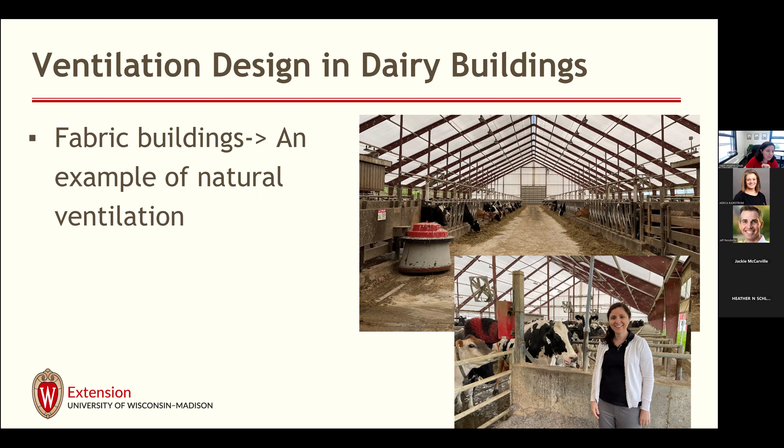This is a very good example of natural ventilation. This is one of the newer buildings, so it is actually state of the art. It's maybe a little difficult to see, but you can see the ventilation fans at the very end. We have the circulation fans, and we also have the exhaust fans that are placed on the roof.

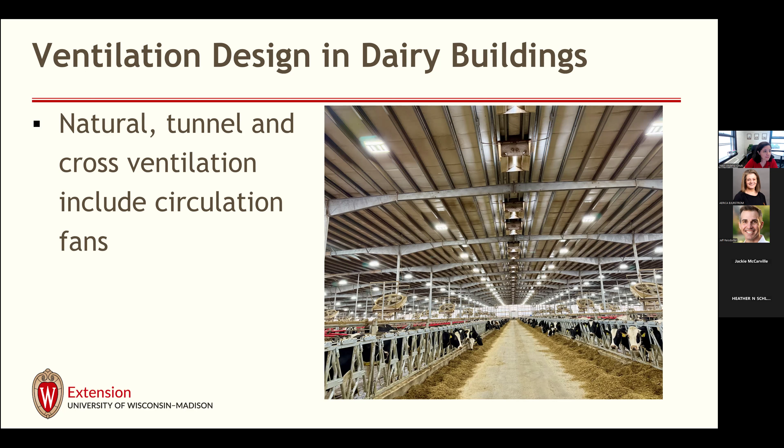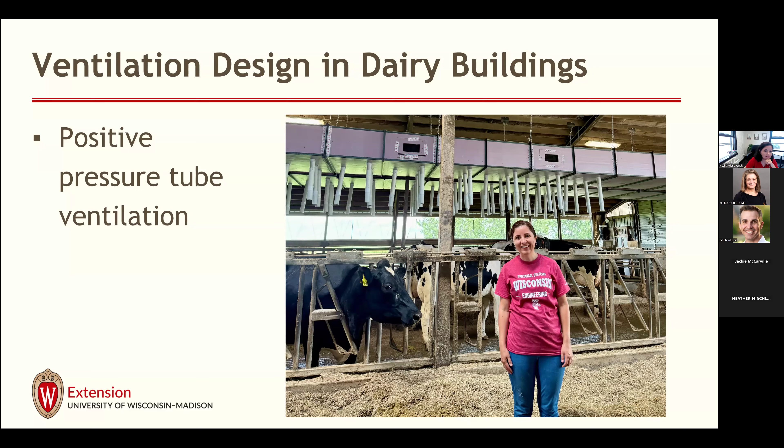So, what motivated us? Why did we develop this online tool? I wanted to talk about this a little bit before we dive into the calculator.

So we looked at the weather data in Wisconsin. There are different regions. According to one source, there are 9 different climate regions in Wisconsin. But when we look at the big picture, we can separate it into 2 regions: northern or central Wisconsin, which has a little bit cooler summers, and the southern part of Wisconsin, where we are located in the Madison area, which has a little bit warmer or more humid summers.

Then we looked at the weather data over the last 20 years. We checked the weather data on average from 2000 to 2004 and compared it to 2020 to 2024, so the last 5 years versus 20 years before that.

Whenever the ambient temperature was over 20 degrees C, which corresponds to 68 degrees F, we called it a summer day. If it was between 4.4 and 20 degrees C, we called it a transition day, so a fall or spring day. And when the temperature dropped below 40 degrees F, 4.4 degrees C, we called it winter.

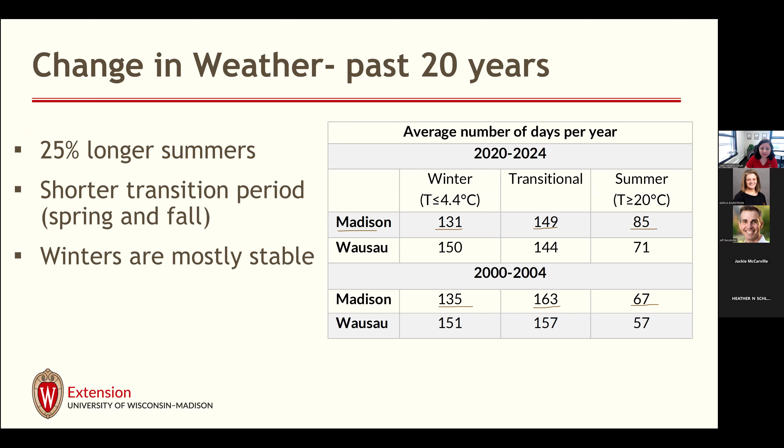So one, weather patterns are changing, right? There are seasonal changes. Two, we do have the wind shadow effect. For example, this is a farm that we are working with. They used to have maybe 1 or 2 buildings, but this farm is growing and they keep adding buildings. And in an ideal world, we add buildings parallel to each other.

But in reality, it's not possible. There are a lot of logistics. For example, if you have a building here and if wind is blowing from the southwest direction, this building here blocks the wind coming in and causes a wind shadow on the barn that I circled here. So one factor is the development of the farm, like having more buildings around, which doesn't let that wind reach our buildings sometimes.

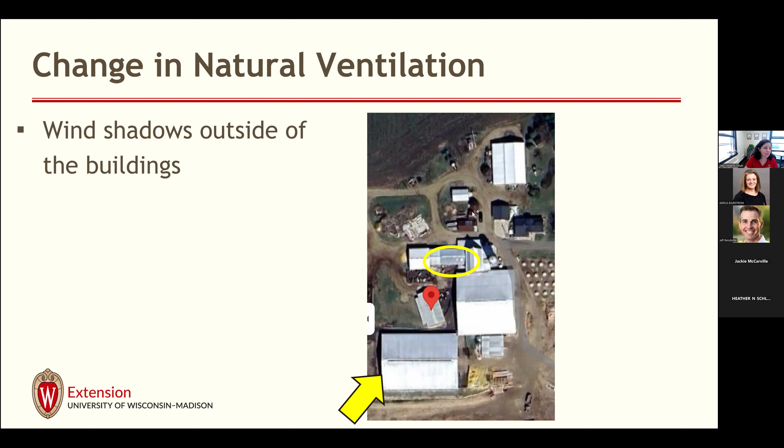And then another factor: wind shadow is not always outside of the building. Wind shadow is sometimes inside the building. For example, we have more robots inside the buildings. Right here we see the AMS units. So if they are put in front of an air inlet, they do block the air coming inside the building.

So here we see a simulation of the barn. Let me see if I can make this work one more time. Here we have the supply fans, which is our air inlet, and here we have our exhaust fans. Air moves in this direction. Here we have the AMS units, so I'll show them here.

Air moves, and then we have the circulation fans, we still have those big circulation fans. And then you can see this first row, which is usually the luckiest row since they are very close to the air inlet, there is a big wind shadow effect there. So we are looking at the velocity data here. These dark blue colors mean low air velocity. We want to see much more lighter blue or maybe greenish colors, especially at cow sitting height. But these AMS units are causing a kind of wind shadow inside the building, not just outside of it.

So, and then we see larger buildings, right? So maybe it used to be only 4 rows, maybe 6 rows. Now we see very, very large buildings.

So there are still places natural ventilation works. I am not saying we should all switch from natural ventilation to mechanical ventilation.

For example, this is the barn that we visited. This is the fabric barn. This is where it is located. So there are no wind shadows around, right? So it can capture all the natural wind that is coming in. And they have a very steep roof, so they have big wide opening side walls. So natural ventilation works for that farm, for that specific building.

But nowadays it doesn't work for all buildings anymore. Basically, due to changes in the seasons, since we have larger barns, and due to all the development, rural development, and having more and more buildings around, and wind shadow effects.

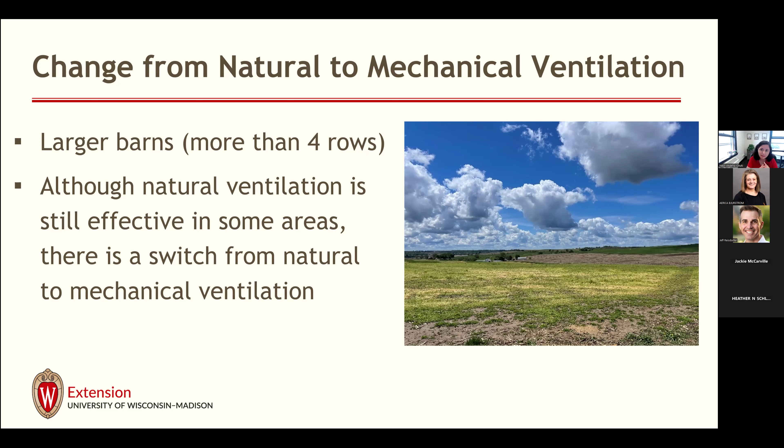So that was our motivation. So if we want to switch from natural ventilation to mechanical ventilation, here's an online tool that is available. And here we see the two links, and I will explain the difference between them.

So our link is go.wisc.edu/coolcows or go.wisc.edu/coolcows2.

And this is how it works. So step number one, we need to choose a location. Once we choose the location, there is a map on the calculator and it highlights that region. I will show you the calculator in a minute.

It is ready on my other screen. So either we are going to say we are in the southern part, or we are in the central part, or the northern part. So two climate regions.

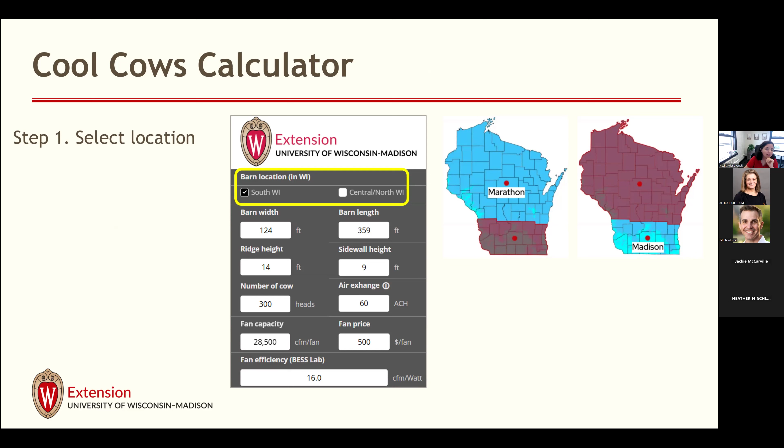Then we need to enter barn dimensions. So some numbers are entered in the calculator. These are just examples, kind of a space saver for you.

Number of cows. So one important part of this calculator is it assumes that there is no overstocking. The reason we are asking is so that this specific barn volume is able to accommodate this many heads. So we have this many stalls and this many cows, and there is no overstocking.

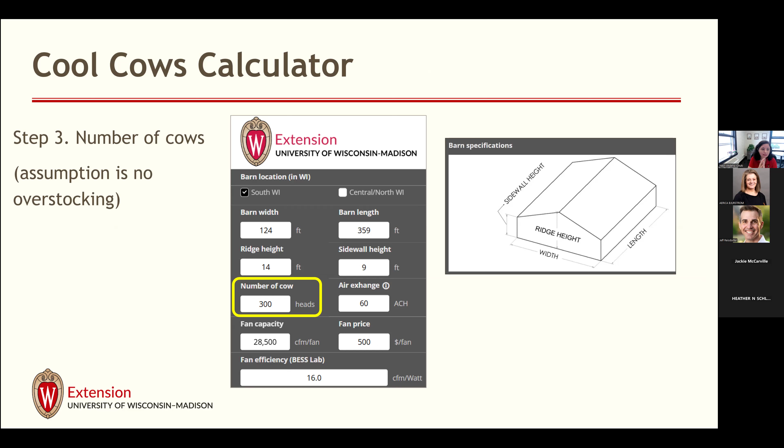So the reason we are asking number of cows is so that we can estimate energy consumption per head, to be able to make some comparisons. That's the main reason we are asking number of cows.

Air exchange rate. The recommended air exchange rate in summer for lactating cows is 60 air exchanges per hour. If you have a different number in mind, 60 has already been entered in the system.

But if you have a different number in mind, for example, if you're not talking about lactating cows, if you're talking about dry cows, if you want to enter a number like 50 air exchanges per hour, you're able to do that. You can just change that number.

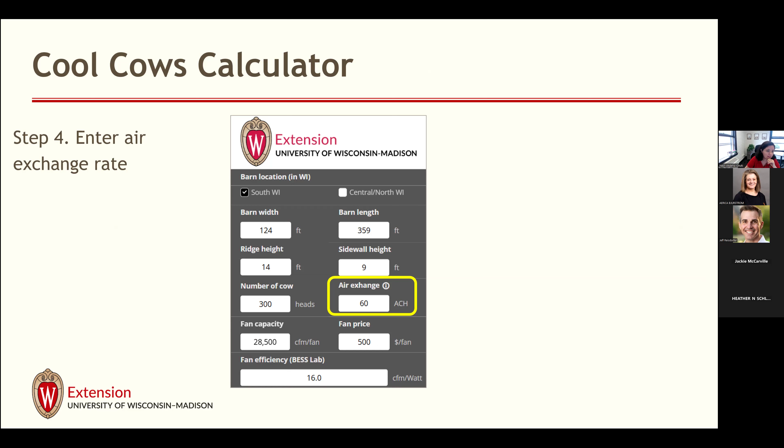And then fan capacity and fan price. This is the difficult part, since we need to have an idea of what type of fan we are going to purchase, and it requires a little bit of research.

So we need to go to the fan companies' websites and search what kind of fans are available, how much they may cost. I understand this is the difficult part, but the calculator cannot do this part for you. There needs to be a little bit of background information here.

But when we are thinking about fan efficiency, please do not look at the fan efficiency at zero static pressure. There is no building with zero static pressure, right? Static pressure is the resistance to airflow.

So anything inside a building increases static pressure. We have cows, we have stalls, we have baffles, we have robots, we have people working—anything increasing static pressure. So static pressure is never zero.

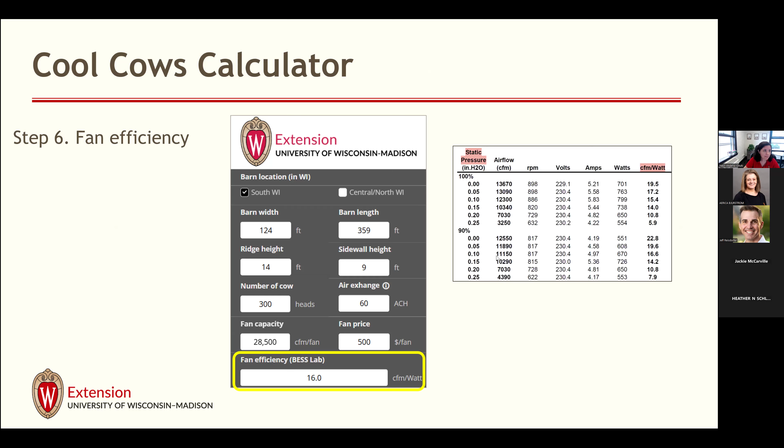And we get the outputs. So voila, it works. It gives us the number of fans required and total fans. We just enter the price of a fan, and it multiplies it.

One very important thing is it gives us the required inlet size. If the inlet size is too small, it increases static pressure. Assume you have exhaust fans and you don't have enough air inlet - those exhaust fans will have a difficult time pulling air through your building. So you need the correct inlet air size. This is the minimum inlet size; less than this will put more pressure on your exhaust fans and lower your fan efficiency.

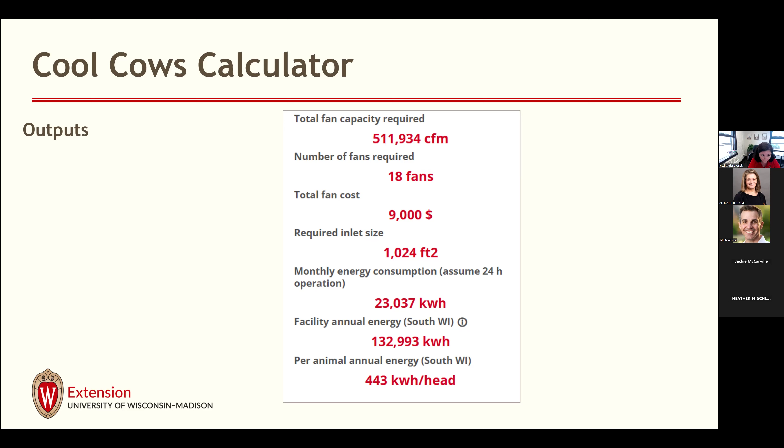It estimates your monthly energy consumption, and also your annual energy consumption. Then by dividing that number by the number of heads, or cows, you have, it estimates per animal, per head, annual energy consumption.

Okay, so let's look at an example.

Erika, this is the part where I'll ask your help - can you see my screen, did it follow me or not? It followed you. If you can make it a little bigger, that would be great. Excellent, right there.

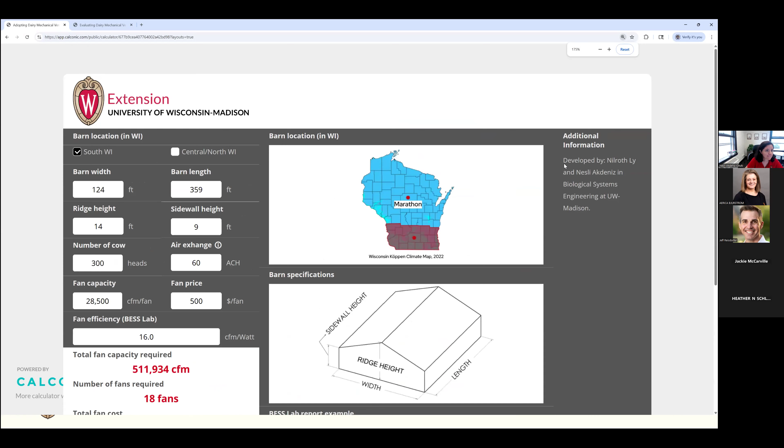As I said, some numbers are entered - these are just example numbers. They will not apply to your building, but just as an example.

First step is we choose our location. As soon as I choose the location, it will highlight. If I say two of them, it will give me a warning sign: please choose one. So I need to choose a location.

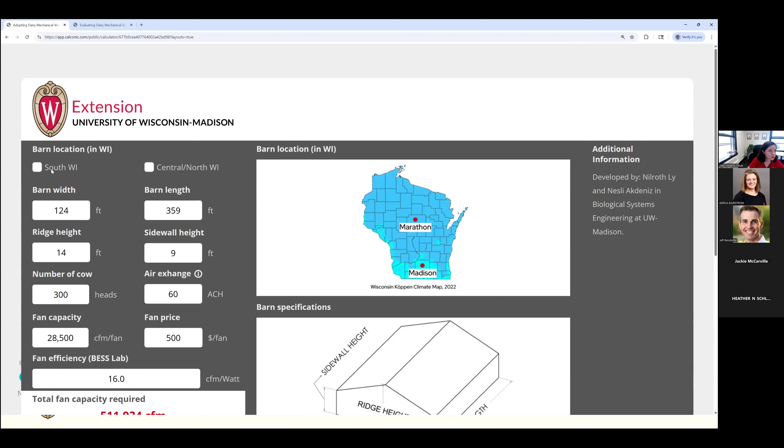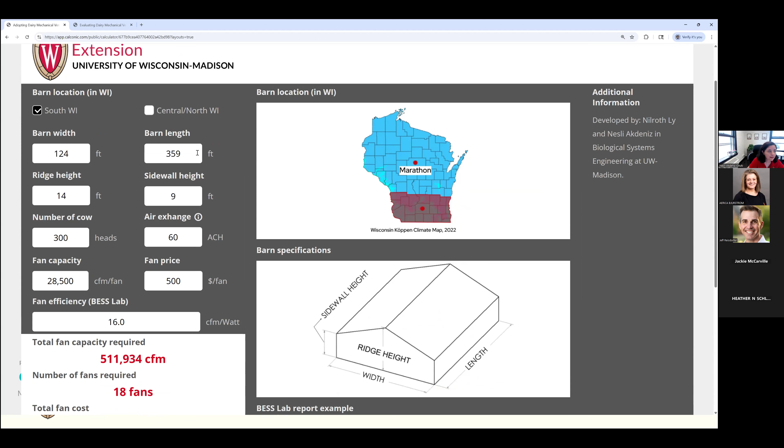Then we can change these numbers - you can enter anything you want and it will adjust the calculations, but we'll keep it for this example. We have the width, the length, the height and the sidewall height, and the number of cows.

Here we're assuming there's no overstocking - there is a sufficient number of stalls per number of head we have inside. Air exchange rate, as I said, 60 is a good number for lactating cows in summer. If we have dry cows, we could change it to 50, but for this example we will keep it.

Fan capacity and fan price - this is the difficult part, the information we need to gather. We need to do a little bit of research. And fan efficiency, so we can see an example here.

We are not going to assume static pressure is zero - we'll make an assumption. We'll say our static pressure is low. If we don't have any baffles inside this barn, it's 0.05, or a little bit higher if we have baffles or cross ventilation, maybe 0.1 or 0.15. Usually static pressure doesn't go above 0.50.

And then we enter that fan efficiency. The advantage of this tool is we can play with our numbers. When we look at the website, there are different options if more than one fan is available.

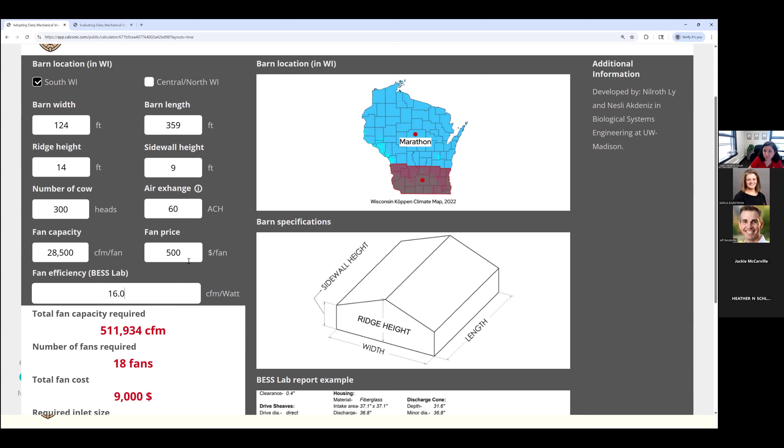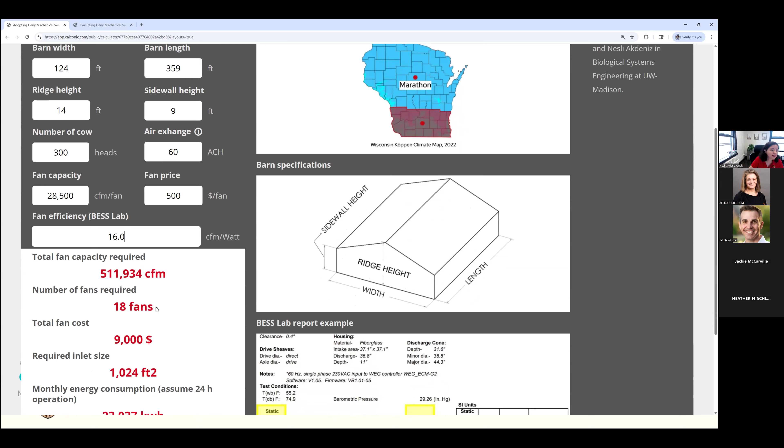One of them is this, for example. Probably the fan price will be a little bit higher than this, but as an example I entered the lower price. Let's say these are our settings - we need 18 fans, and it costs us $9,000 to purchase these 18 fans. The annual energy consumption per head is 443.

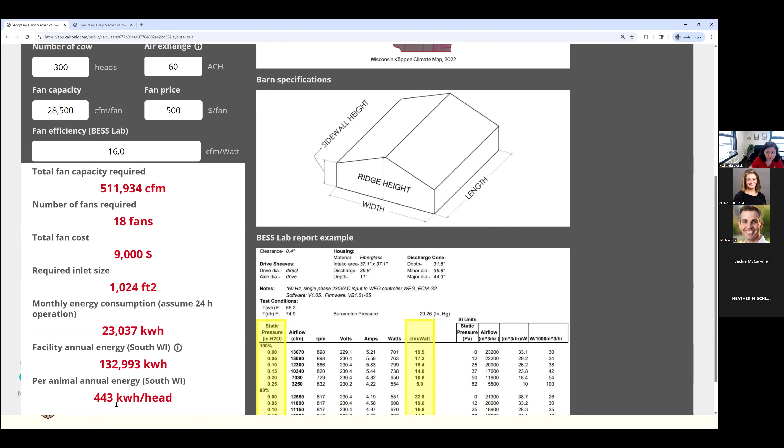Let's say there's another model available with a little bit higher capacity. Since it's a bigger fan, let's say it's more expensive. Usually larger fans are more efficient - the smaller the fan gets, usually efficiency goes down. So we can assume it is a little bit more efficient.

We needed 18 fans before; now we need 15 fans. So we can think about the space that will take - do we have enough wall space to put 18 fans, or does it make more sense, although these are a little bit bigger fans, to have 15 fans? Since if it's tunnel ventilation, our space is usually limited on the wall, and we're putting those fans on that short wall, so there isn't usually enough space.

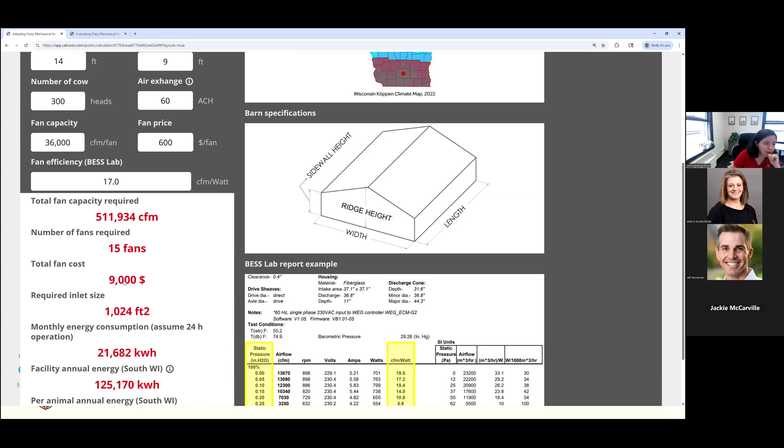So sometimes thinking about it, maybe we don't buy this model but we buy this other model - then instead of 18 fans we need 15 fans, but we'll have enough space. It may help. The total fan cost didn't change for this example, but when we look at the per-head energy consumption number, it used to be 443, now it dropped to 417.

So 6% decrease in energy consumption, right? So we save that much energy, that much ventilation electricity energy consumption since our efficiency went up, since we prefer the little bit larger fan.

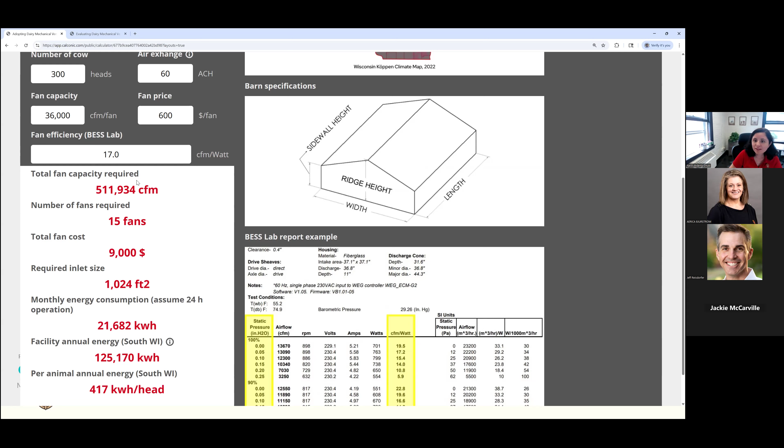So this calculator allows us to play with these numbers, and most importantly, it gives us the required inlet size. I have seen buildings that do not have the correct inlet size but have many exhaust fans. Even when you visit, it's difficult to count - they have more than maybe 30 exhaust fans, but they don't have enough inlet size. So those exhaust fans are having a difficult time to work.

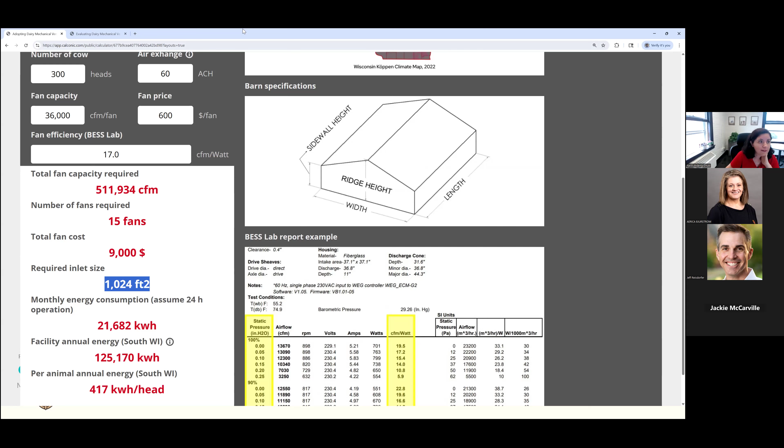So one limitation of this calculator is we are assuming that we can achieve 60 air exchanges per hour - the whole calculations are made based on that assumption. But based on the model or fan capacity you use, you may not achieve exactly 60 air exchanges per hour. It might be 62 or it might be 57. So after designing your mechanical ventilation system, if you want to test how it is performing, we have the second version of the calculator.

We call it Cool Cows 2. We can come to this calculator and enter - it's a little bit different version. We enter how many fans we have and our fan capacity, and it gives us the air exchange rate. It's doing the same calculation, but in a little bit opposite order, so that we can see how your system will perform. Or if you already have a mechanical ventilation system, you can check how it is performing - it's kind of an evaluation or assessment calculator.

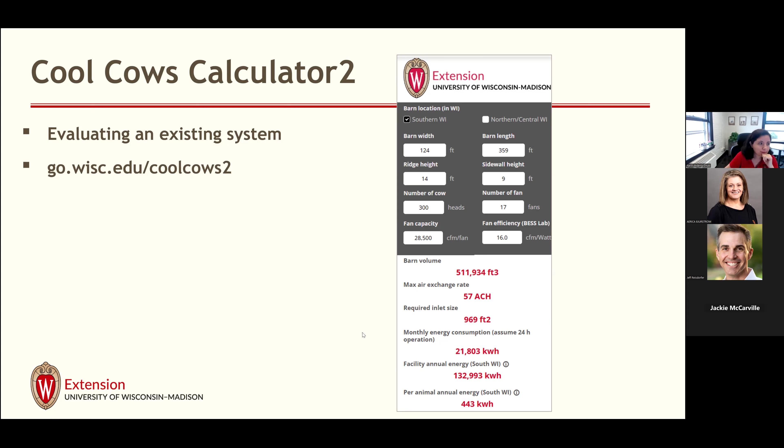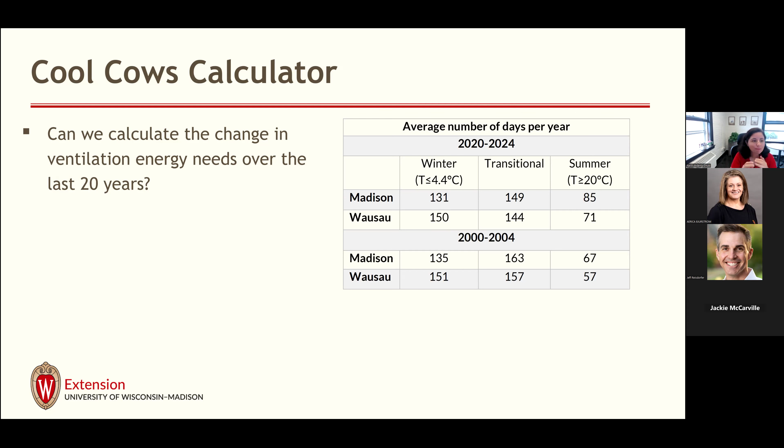If we make a couple of assumptions, we can, right? Just for comparison purposes, we will make a couple of assumptions. So 60 is our magic number - by now we know, right? 60 air exchanges per hour in summer, 4 air exchanges per hour in winter. These are our magic numbers we enter in all calculations.

And then what happens in between, right? Winter, summer - are we going to assume an average number, say 40 air exchanges per hour? Or in this calculation, just for the calculations, we assume that we adjusted the air exchange rate in 5 intermediate steps between 60 and 4. In reality, in a working farm, there's no way we can control ventilation this accurately - not like 5 intermediate steps. But to be able to compare data, to make a fair comparison, we made this assumption.

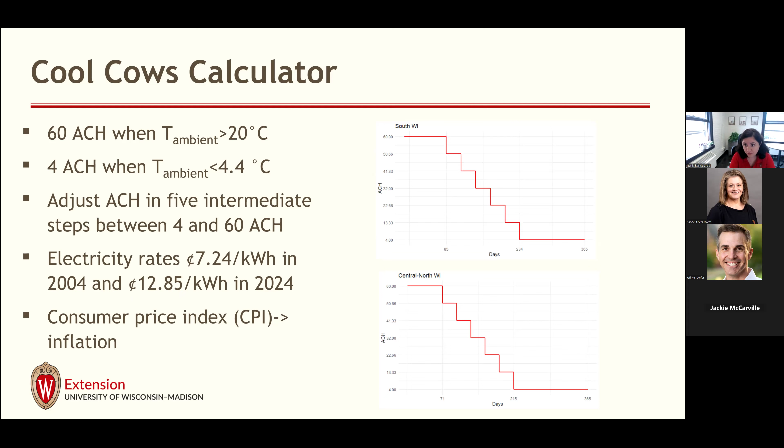And electricity rates - I searched this one a lot. It really depends where you're located, what region it is. But let's assume it is around 7.2 cents per kilowatt hour in 2004, like 20 years ago, and now it is 12.85 cents per kilowatt hour as of last year. And there's inflation, right? So over the 20 years, everything has changed. We can use the consumer price index to take into account the inflation rate. So here's our calculation.

So over the last 20 years in the Madison area, southern Wisconsin, energy consumption or electricity cost increased 14%, and in the central or northern region, it increased 11% per head. So it is getting more expensive to ventilate those buildings, basically due to changing weather patterns and changing electricity rates. Now it is much more expensive to ventilate a mechanically ventilated building, so it's very important that we enter all our numbers correctly and design the system efficiently so it doesn't cost us more in the future.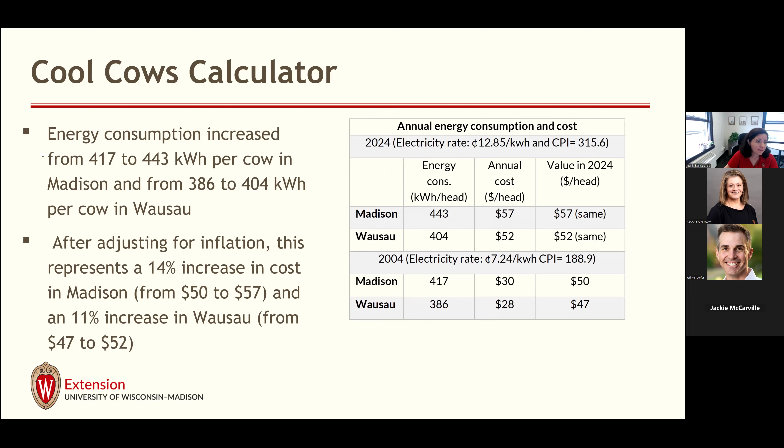All right, so we assume there is no overstocking in this calculator, and I wanted to prepare just two slides to show you how overstocking affects ventilation. In this study, what we did was adjust the ventilation rate. We cannot simply say we're going to put more animals inside the building and just increase the ventilation rate a little bit, so it doesn't work like that.

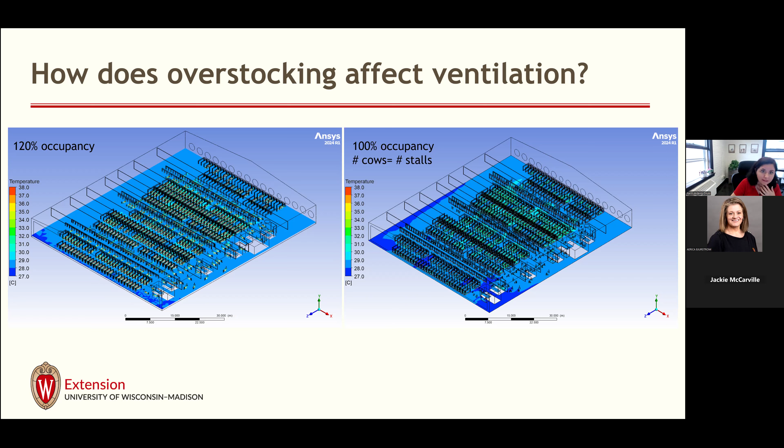All right, so ventilation - I kept saying 6 air exchanges per hour. This is our magic number, and we're thinking about heat stress. We don't want these cows to be stressed, we want them to be comfortable. So we always talk about temperature, and maybe refer a bit to humidity, but ventilation design is more than these two - it's not just temperature and humidity. We have air quality inside as well.

We have the noise levels when we're buying these fans in the catalogs - they give the noise level that each fan causes. We may be able to check those noise levels and light, how much light we're receiving based on the ventilation system we choose. Sometimes people ask, what's the relationship between ventilation and light? And I will show you an example in a minute.

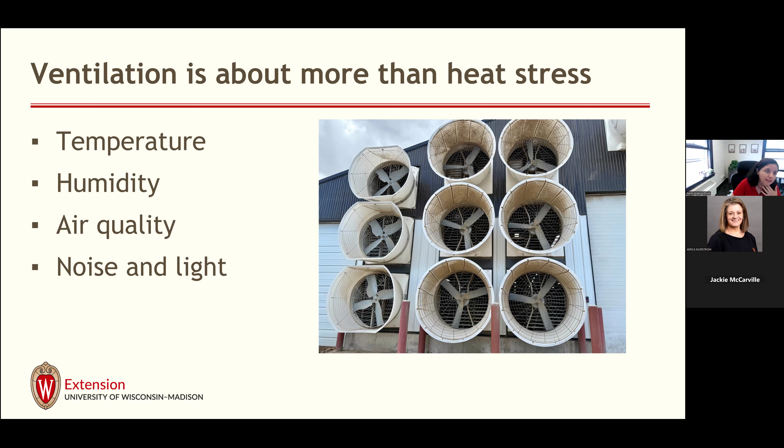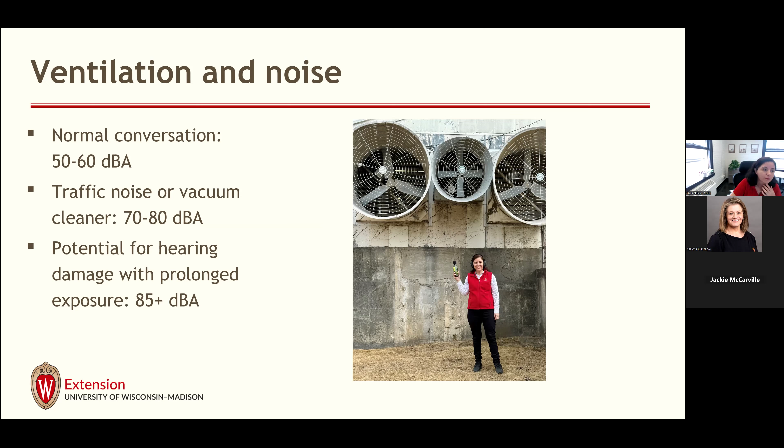Okay, so noise levels, we want them to be below 85 decibels. Prolonged exposure above 85 decibels is not recommended. So one way is to check the catalog before we buy the ventilation fan, and if there is a less noisy option, if the decibel level is lower, and if the price is correct, it might be a fan that we may prefer to purchase.

So there are some numbers. We did a small study, we measured the noise levels. Circulation fans are usually below that 85 decibel threshold. Low capacity supply fans are also good. Some high capacity exhaust fans, some very large fans, or fans that are not maintained well, they may exceed that level. And if you have animals sitting just next to those exhaust fans, or if you're spending significant time as a worker close to those exhaust fans, it might be something you want to pay attention to.

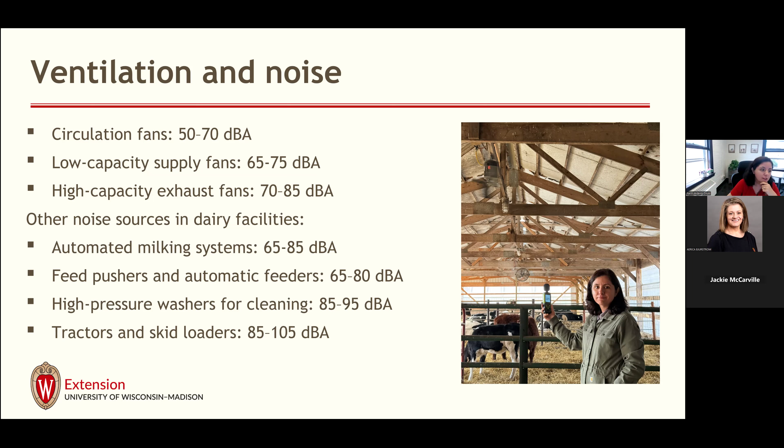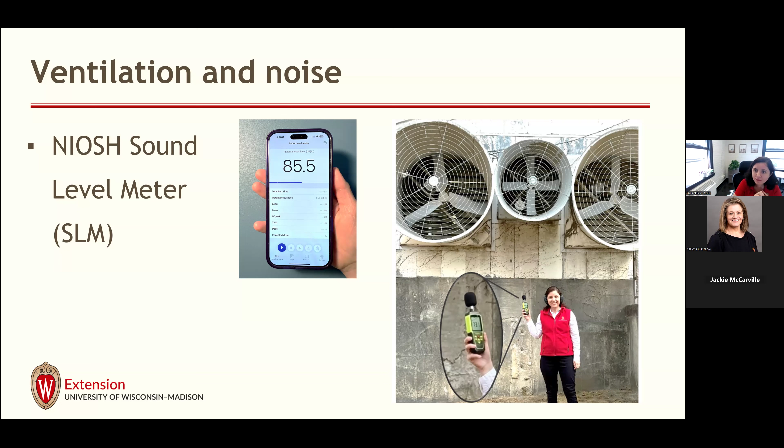So it's very easy, there are apps. There's an app from NIOSH which you can use. There are some smartwatches, they measure the noise level. You may want to buy a very inexpensive noise meter, a decibel meter, so you can just measure the levels and use it as an indicator. If there's a change, it means the fan may need some maintenance. The change in noise level may indicate a poorly maintained ventilation fan. If it's less than that threshold, then you're fine, but if you're coming close to that threshold, or if you feel like it bothers you, then it's time to take action.

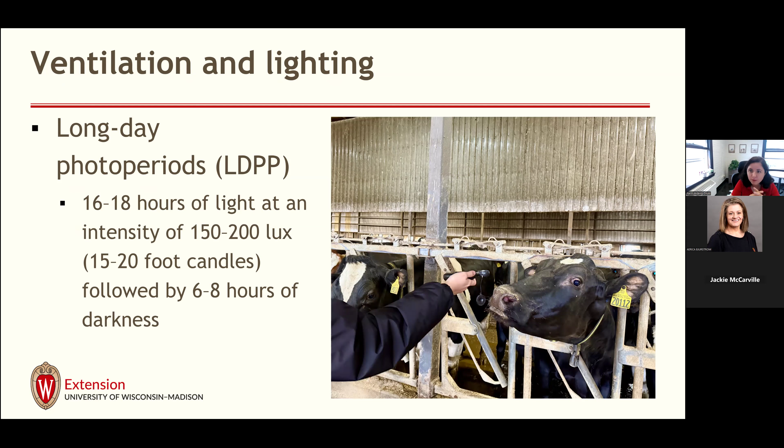And then the lighting level. So there isn't a very recent study, but there are some studies in the past. They report that we want 200 lux at the cow eye level. This is not super bright, actually, probably my office today is brighter than this, but we don't want them in very dark conditions, especially during long winter days, since it does affect their metabolism.

So how is it related? Ventilation and lighting - we visited several farms and measured the light levels inside these buildings. If it's a naturally ventilated building with ridge vents, those windows on the roof, they help a lot, they are naturally very bright. So with this kind of building, you may want to turn off your lights to save energy since it's already bright inside. If you're talking about a 200 lux target, the levels we measured were about 1000 lux, so naturally they are bright.

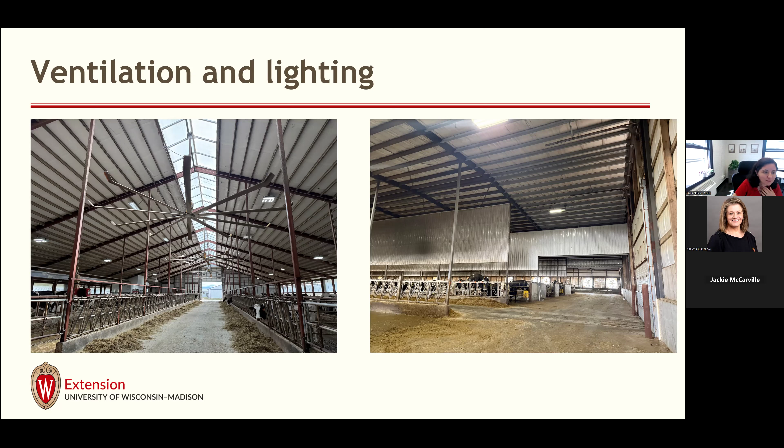Okay, so this is kind of a summary of what we found. For example, office lighting is 300 to 500 lux, we're looking for 200. We visited many naturally ventilated or hybrid ventilated buildings, and they were all above that 200 lux threshold. Cross ventilation, especially if they have baffles, may be less bright - in one case the light level dropped below the 200 lux threshold. If that's the case, just be aware.

Or when you're developing this ventilation design idea, or thinking about mechanical ventilation, what can be done? If we have a ridge vent, although we don't use ridge vents that often anymore, having that helps a lot, especially during long winter days in Wisconsin winter.

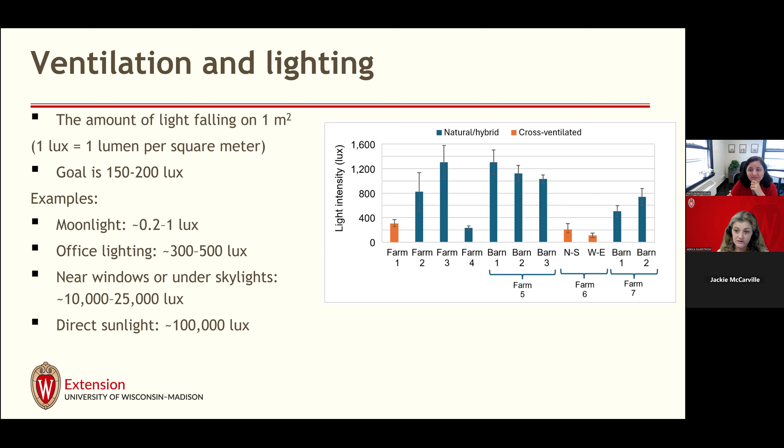We don't have any questions in the Q&A yet, but I have a couple of questions. Is this only available to Wisconsin farmers? I know you work for Wisconsin and made this for Wisconsin farmers, but outside, are other people's areas available on this app? Can they select other areas?

It does apply, but the only difference might be the region. We selected northern region or southern region, so maybe think about the north central area, where we are located. You can choose the northern or southern region based on your location. If you're more like the Minnesota side, maybe the northern region; if you're like the Illinois side, maybe the south.

So for instance, if a farmer from Missouri wants to try to use it, that's closer to southern Wisconsin, but it's not necessarily going to apply to their area weather-wise. Yes, that's okay. That's good to know.

The other question I had is how easy is it to print out the report? What does the report look like that they would hand over to their salesperson or distributor from the fan company? It does the calculations immediately, like an Excel spreadsheet. You can get a print screen, or you can just go ahead and print it as a PDF if you want a report in your hands.